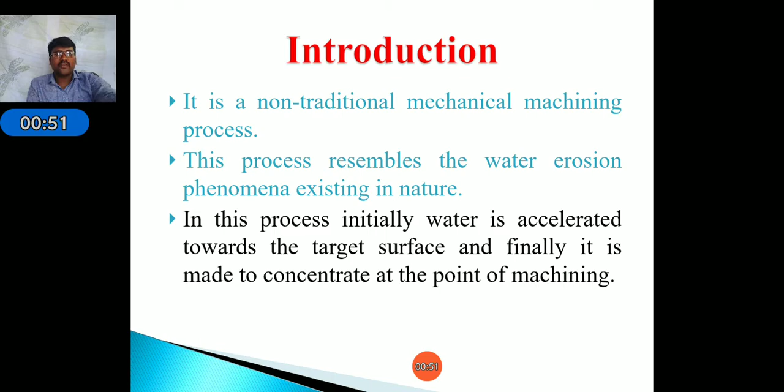Water jet machining is a non-traditional machining process that resembles the water erosion phenomenon existing in nature. Initially the water is accelerated toward the target surface and made to concentrate at the point of machining, where the nozzle is placed at a certain distance from the workpiece.

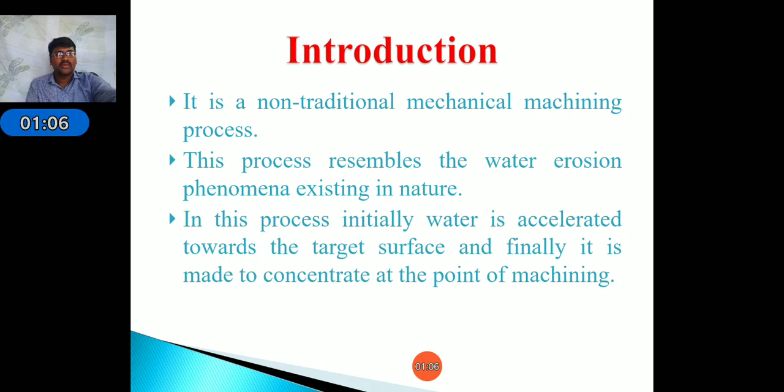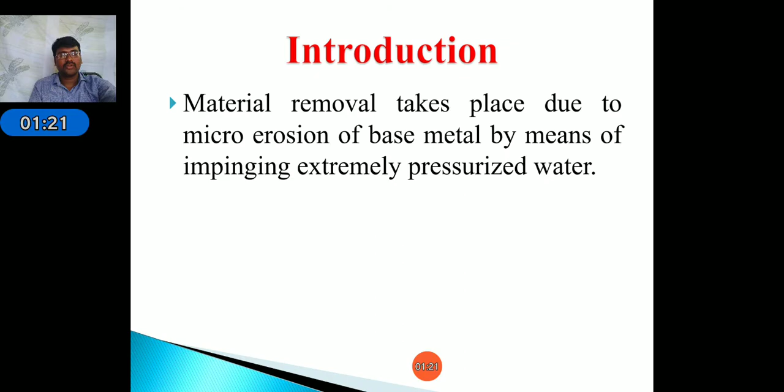Material removal takes place due to the micro erosion of the base metal by impinging extremely pressurized water. It is a cold cutting process, similar to abrasive jet machining.

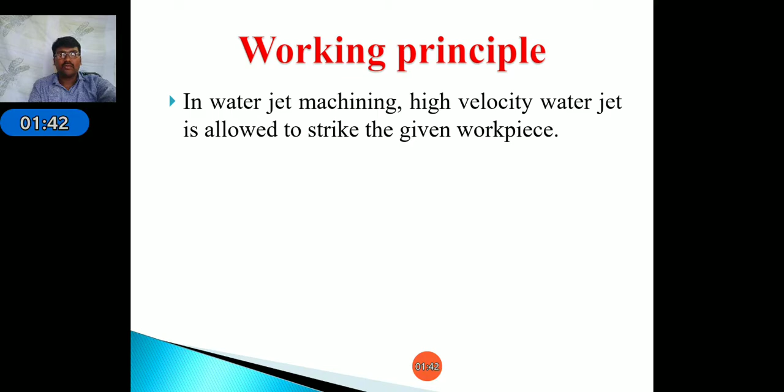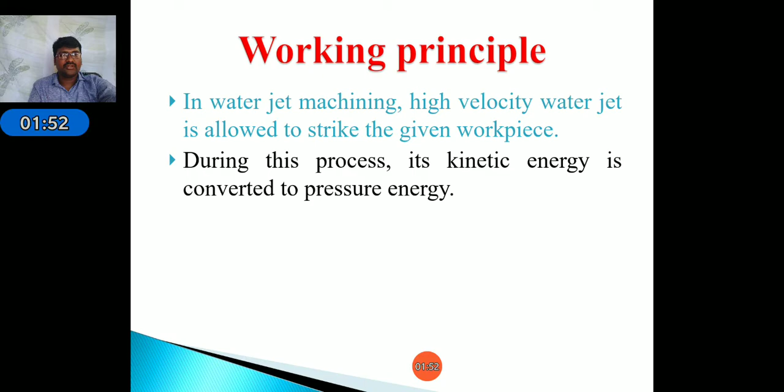Working principle of water jet machining: a high velocity water jet, higher velocity than in abrasive jet machining, is allowed to strike the workpiece. During this process, its kinetic energy is converted to pressure energy, which induces stress on the workpiece. When the induced stress is high enough, unwanted particles of the workpiece are automatically removed.

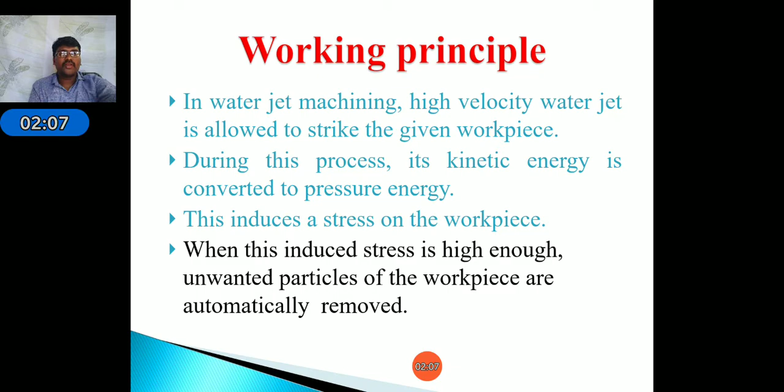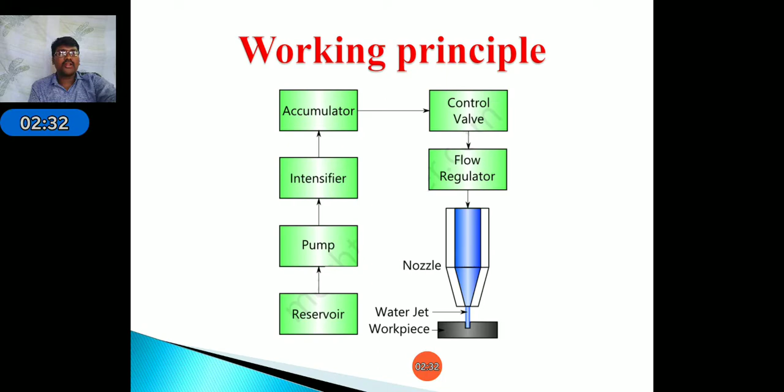The reservoir is used to store water for the machining operation. The pump pumps water from the reservoir to the nozzle where we machine the workpiece. The intensifier increases the pressure energy.

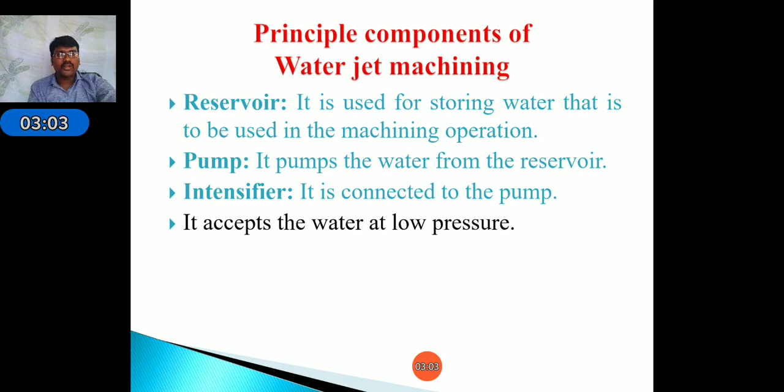The intensifier accepts water at low pressure and pressurizes the water acquired from the pump to a desired level, nearly 4000 bars. By using the intensifier, we can raise low pressure water to high pressure.

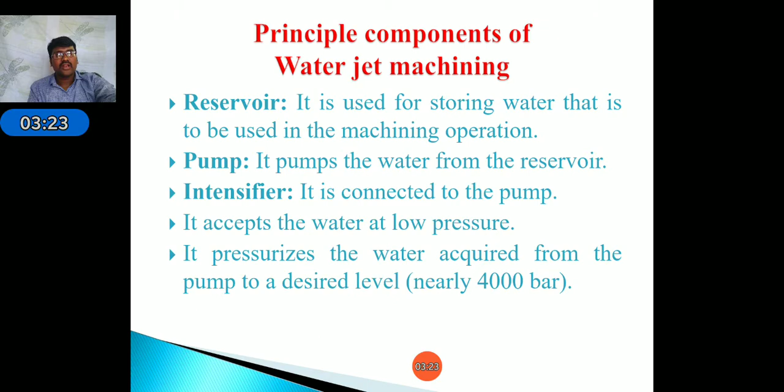The control valve controls the direction and pressure of the pressurized water supplied to the nozzle. The flow regulator is used to regulate the flow of water. The nozzle renders the pressurized water as a water jet at high velocity. The accumulator is used for temporarily storing pressurized water.

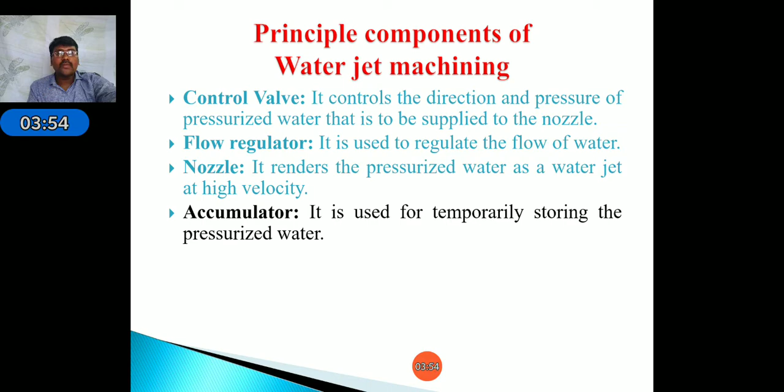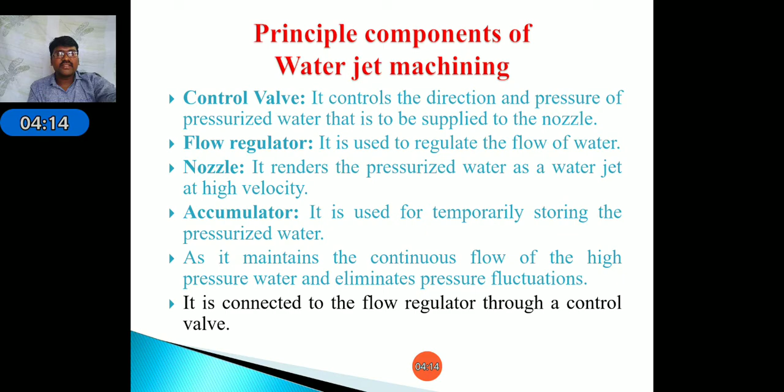After the intensifier, we use the accumulator for temporary storage of high pressurized water. It maintains continuous flow of high pressure water and eliminates pressure fluctuations. It is connected to the flow regulator through a control valve.

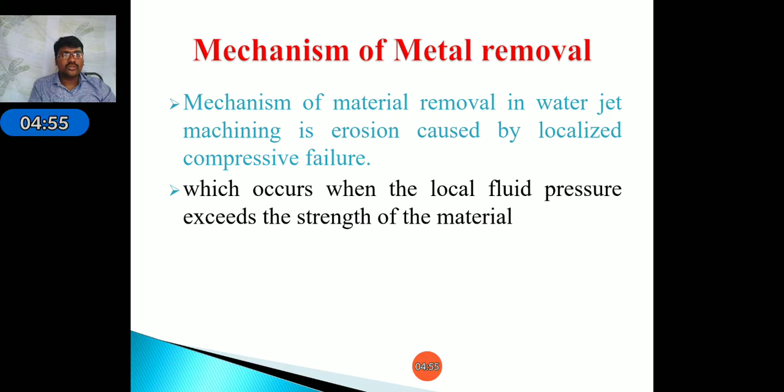Mechanism of metal removal: in water jet machining, erosion is caused by local compressive failure, which occurs when the localized pressure exceeds the strength of the material. If the applying pressure is more than the strength of the work material, the particles where the water jet falls on the workpiece will erode, and due to this erosion the material is removed.

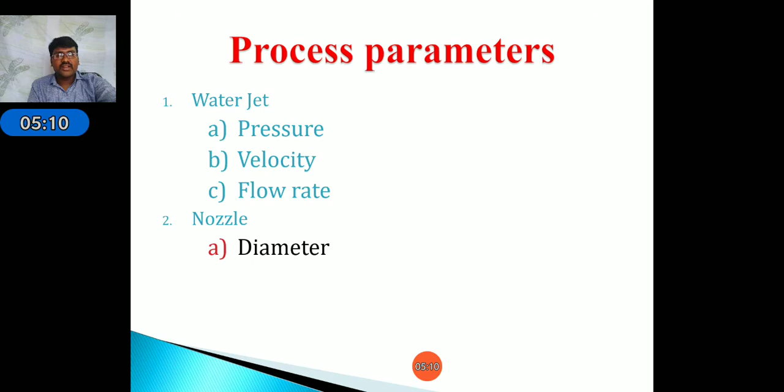Process parameters of water jet machining include pressure, velocity, and flow rate. For the nozzle, parameters include diameter and standoff distance, which is the distance from the nozzle end to the workpiece.

Coming to advantages: water jet machining is a relatively fast process compared to other processes. In the case of abrasive particles, the material removal rate is very low compared to water jet machining.

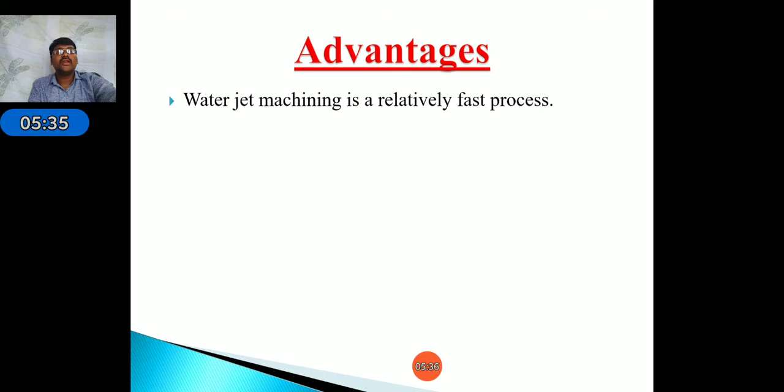It prevents formation of heat affected zones on the workpiece because water acts as a coolant, so no significant heat is generated.

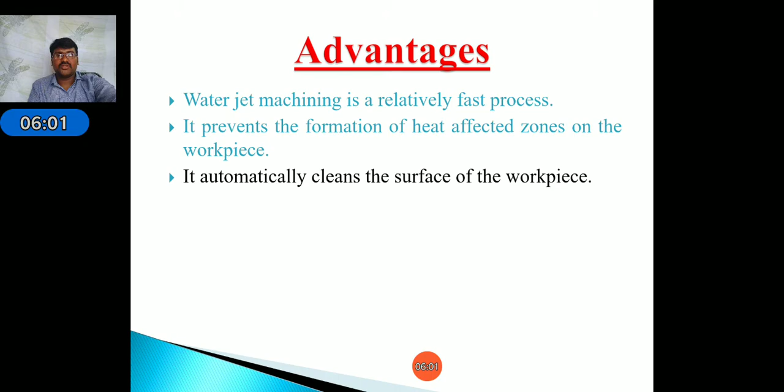It automatically cleans the surface of the workpiece due to the action of water. Water jet machining also has excellent precision, with tolerance of the order of plus or minus 0.005 obtainable.

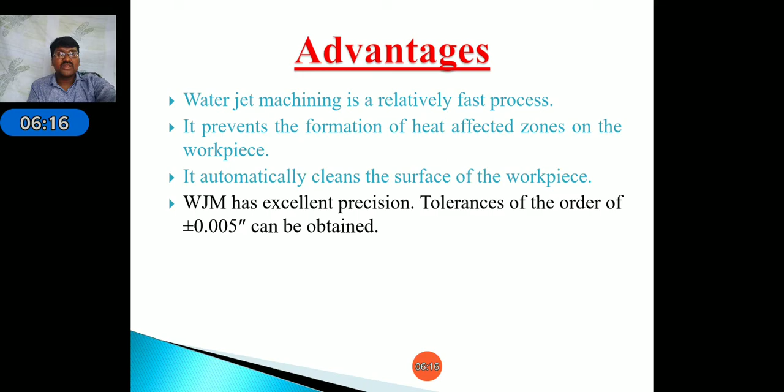That much accuracy can be obtained using water jet machining. It does not produce any hazardous gas, and it is eco-friendly. These are the advantages of water jet machining.

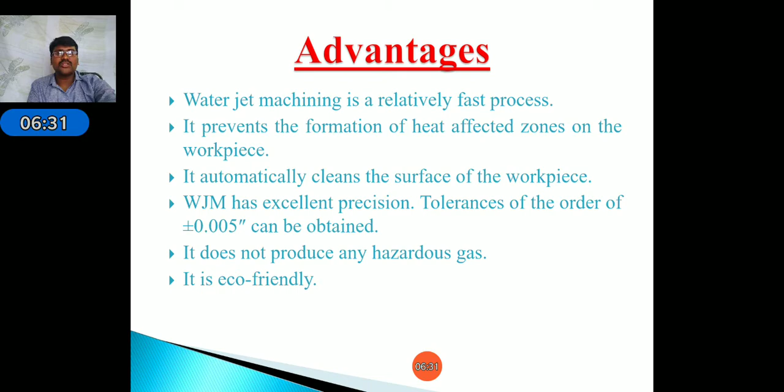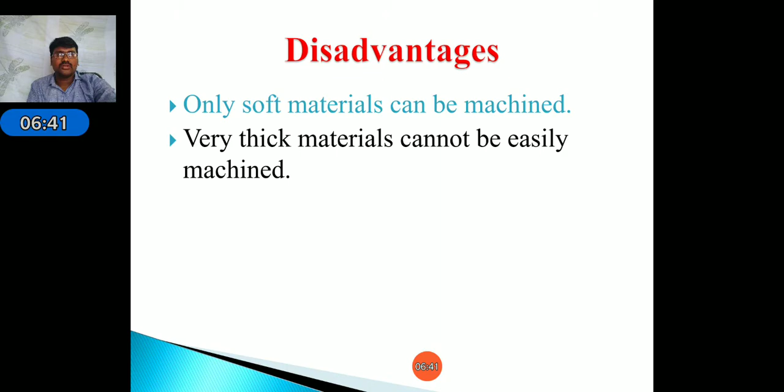Coming to disadvantages: only soft materials can be machined using water jet machining. Very thick materials cannot be easily machined, though thin materials can be machined easily. Also, the initial investment is high.

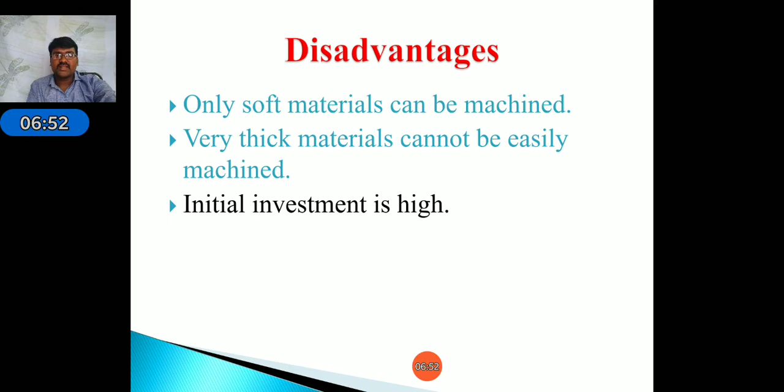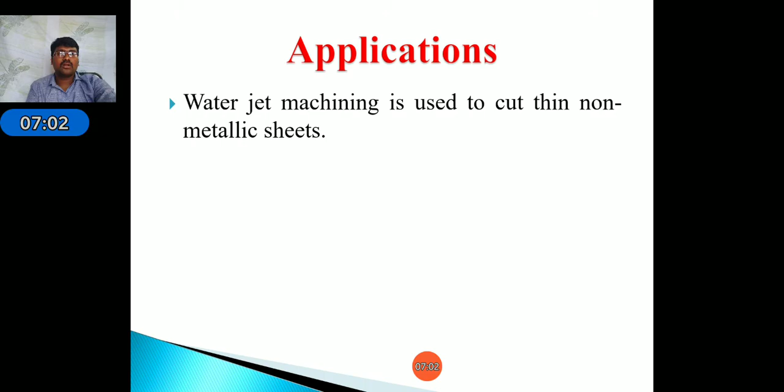Applications: water jet machining is used to cut thin non-metallic sheets, since metallic sheets have high hardness and strength while non-metallic sheets have less strength. It is used to cut rubber, wood, ceramics, and other soft materials, as well as for machining circuit boards.

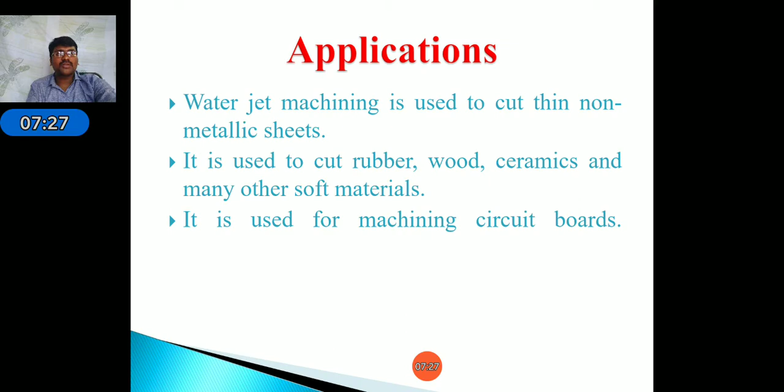Next, the working of water jet machining. We will describe it using the diagram.

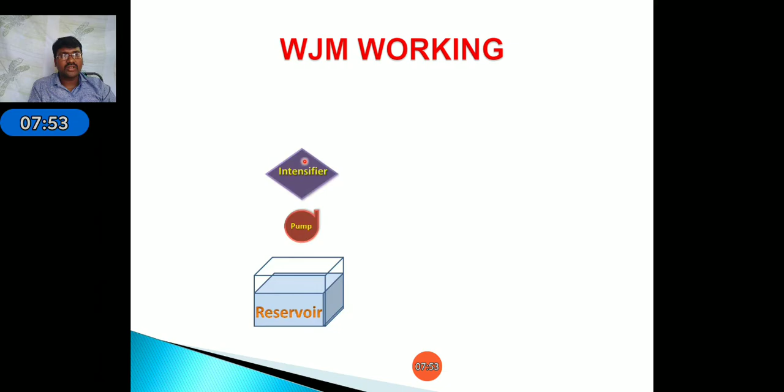The reservoir is used to store water in the tank. The pump is used to supply water from the reservoir to the intensifier. The intensifier is used to increase the water pressure coming out from the pump.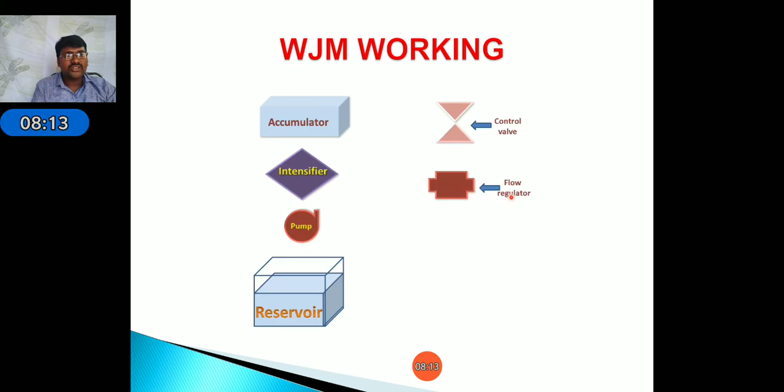The accumulator is a device used for temporary storage of pressurized water. The control valve controls the flow of pressurized water.

The flow regulator regulates the flow coming from the water reservoir. The nozzle converts pressure energy into kinetic energy, and it reduces in diameter from input to output. This leads to the workpiece to be machined.

Here the connections between components are made using pipes. The reservoir is used for storage of water, and the pump supplies the water from the reservoir.

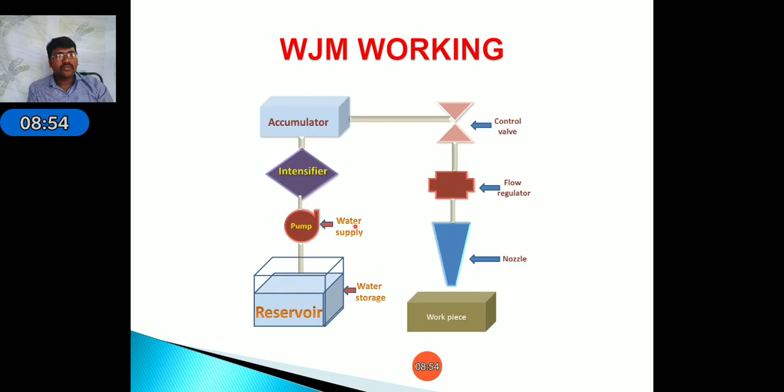The intensifier is used to increase the water pressure, and the accumulator is used as temporary storage.

The control valve controls the water flow, the flow regulator regulates the water flow, and the nozzle is used to increase the kinetic energy of the water flow.

The high velocity kinetic energy of the water coming out from the nozzle hits the workpiece.

Due to this striking on the workpiece, the material is removed. By using this process, we can machine the workpiece using the water jet.